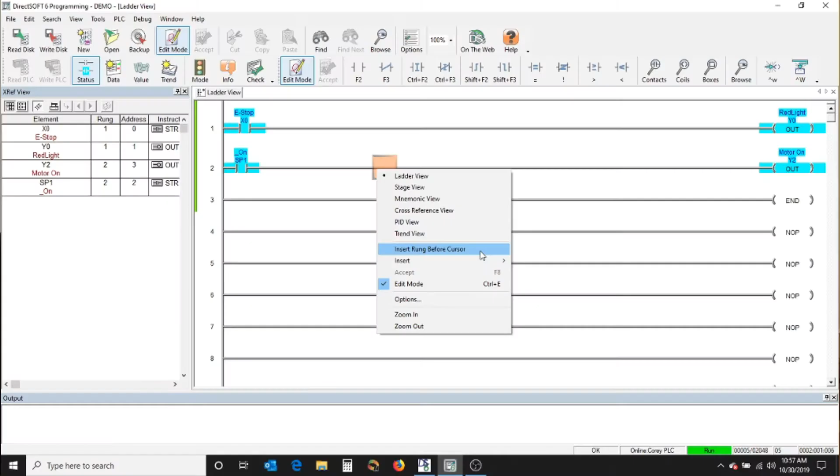So here we're going to activate our green light here by using latching relay logic. Okay, so we want to have our X7 button start the motor, and we have to have our E-stop on. So X7 and X0, we want both of those to be on.

And here in our coils, we're actually going to pick a set coil. Alright, and we're going to make that C1. And then our motor will latch on at C1. So that's the latching or setting of the controller.

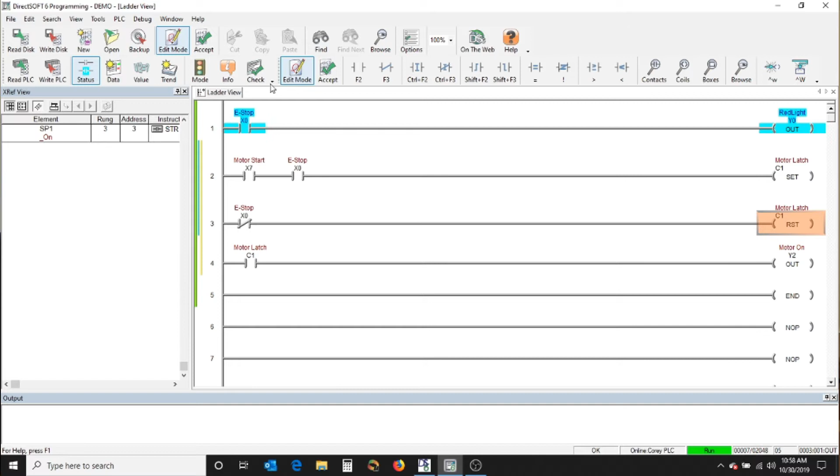And then we're going to add another one where we're going to say not the E-stop, and that will actually activate the coil, RST or reset. And make sure to type in C1 there so it actually works. Alright, we're going to go ahead and write this. So our E-stop is on, so we have a green light. Alright, turn that off. Doesn't do anything.

Alright, so here if I press this, you can see it go ahead and set our motor latch to on, and therefore our motor would be on, which is Y2. Alright, if I press the E-stop, it resets it.

Alright, now let's just make sure that from before that when the E-stop is pressed that we can't go back and start the motor, which we can't because our E-stop is not on. When we release that, go ahead and put it right back on. Alright, so that's the second way to do latching and resetting.

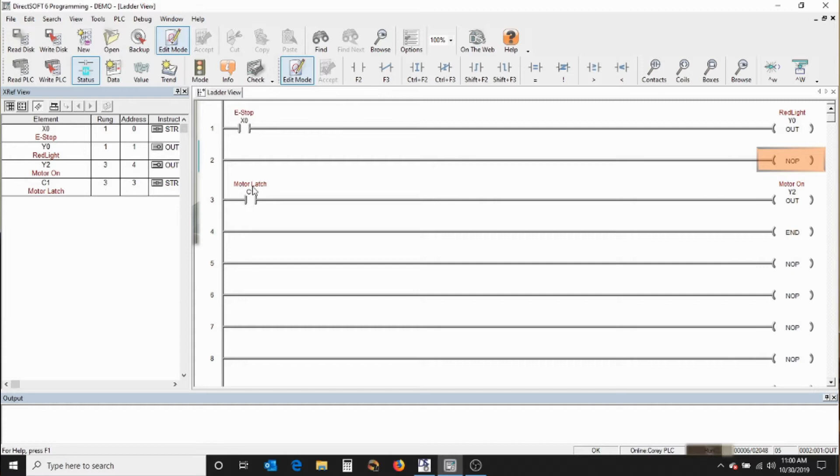Alright, now let's look at timers. So in a PLC, doing a timer is very easy. Back before that, you'd have to buy timing relays, which are not cheap. So in our logic, we have contacts, which are the lines or the lines with the cross through them, and then we have coils, which are the things that will go on the right.

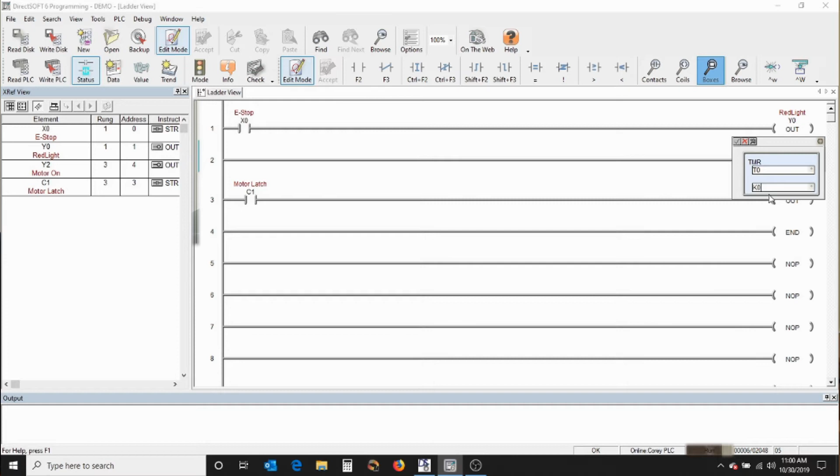We also have boxes. All right, so one of the cool boxes here is timers. And I'm going to use the timer box, and this timer box operates in tenths of a second. So every count here is 1/10 of a second. So I'm going to say that I want to count to 25. So that's 2.5 seconds.

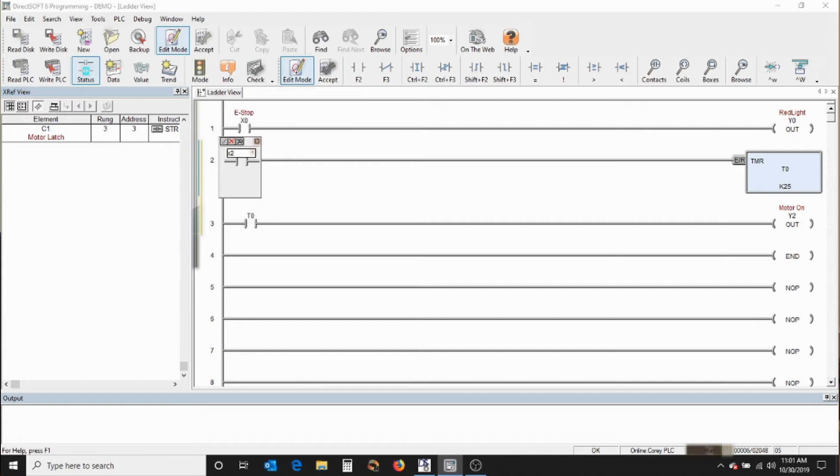And instead of using C1 to turn my motor on, I'm going to use T0 for timer 0. And I'm going to use button 2 to start my timer. Alright, so let's go ahead and write that.

So I'm going to say, theoretically, if I hold my clutch in for 2.5 seconds, it's going to start my motor. Alright, 1, 2, go. Alright, so there it is. And I got to hold another 2.5 seconds to make it go on. And I don't have any latching functions here.

Alright, so let's say I had a diesel motor and I was going to turn the key, and the key was going to first heat up the coil so that the fuel about to be combusted is warm enough to do it, and they've got a little heater there, and you hold the key in a certain position and then you can go ahead and start it.

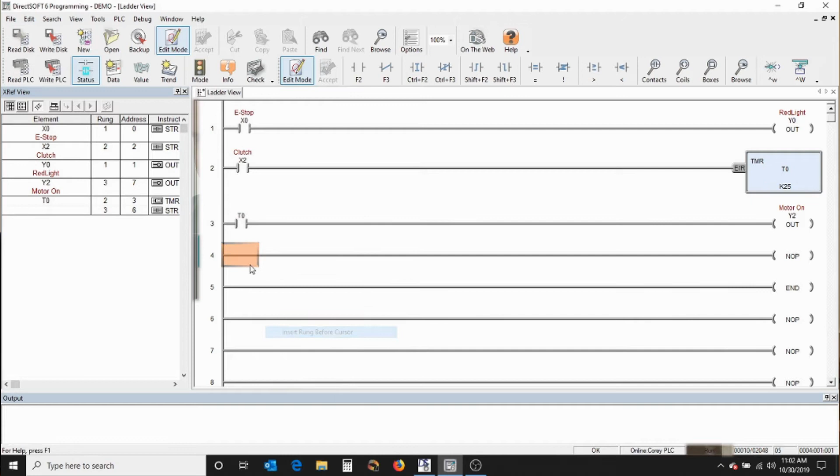Alright, so let's say that I'm doing that, and I want to indicate to the operator that I'm doing it. Generally not a light, it's probably a buzzer, and sometimes it's probably both. Alright, so what I want to say here is we're going to insert another line, and we're going to say if it's not T0.

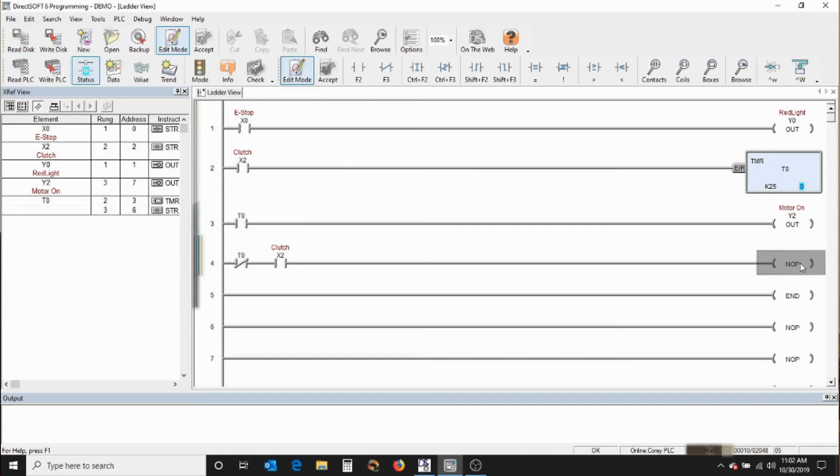Alright, so if it's not quite gotten to the timer count, what happens is that's going to be on all the time that we're not pushing X2. So we actually want to have the button X2 plus the timer. Alright, so we're going to have both of those, and then we're going to say we want Y1 to be on. Alright, go ahead and write that.

Okay, since I'm not pushing the clutch button, that isn't on. But as soon as I do it, the yellow light comes on, and then the green light will come on. The yellow light will go off. All right, if we do it again. All right, so that is a basic way of how to use a timer, and there's different variations. You can go in and look and see what all the different timers do.

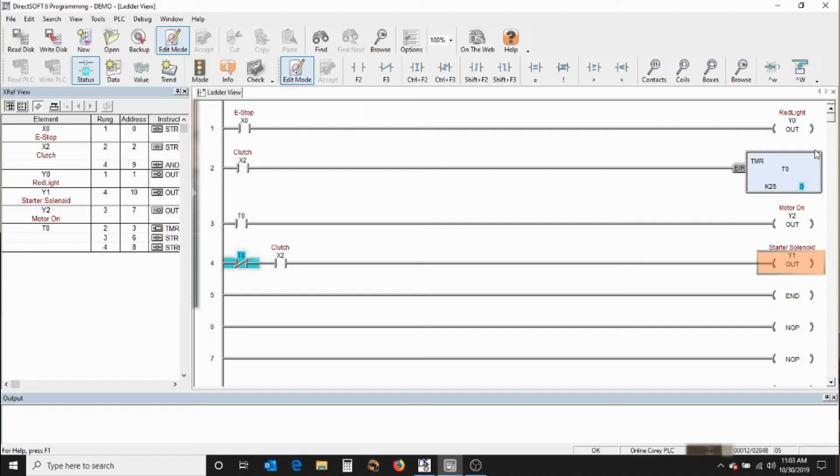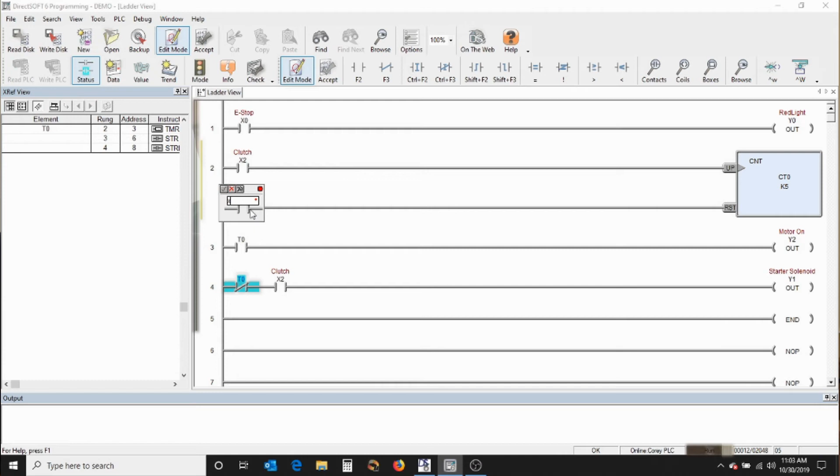So the next thing I want to show you is a counter. Counters are cool because you can do things that you really can't do with ladder logic. So we're going to replace this box here with a count, in this case CNT, and it just records how many times you've done something. So I'm going to count 5, and I'm going to use the clutch still. If I press the clutch 5 times, it's going to turn the green light on.

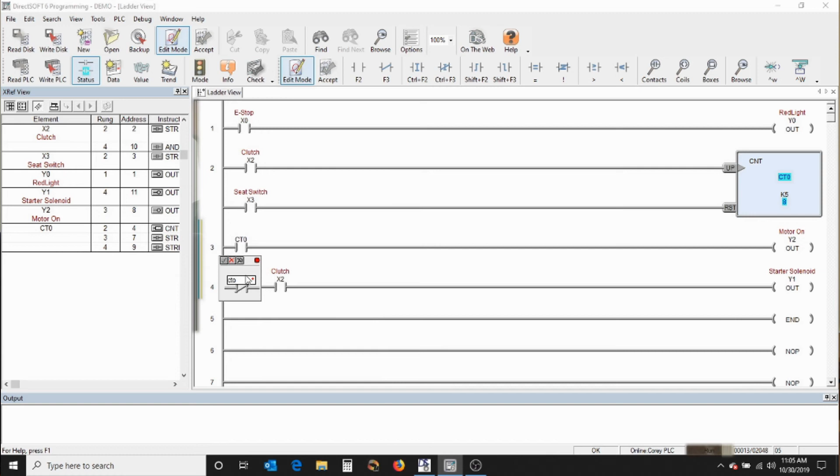Before we write the program, we also need to recognize that we switched from a timer to a counter, so it's a different label. All right, so here now it's CT0 instead of T0. All right, so I gotta change that to CT0. Oops, not CTO, CT0. And we'll go ahead and write that to the PLC.

All right, so we have our green light on. So I'm going to go ahead and restart that. And 1, 2, 3, 4, here it is, woohoo, 5, green light. All right, so that's what happens, and then I can reset it there. So counters are really not very difficult at all.

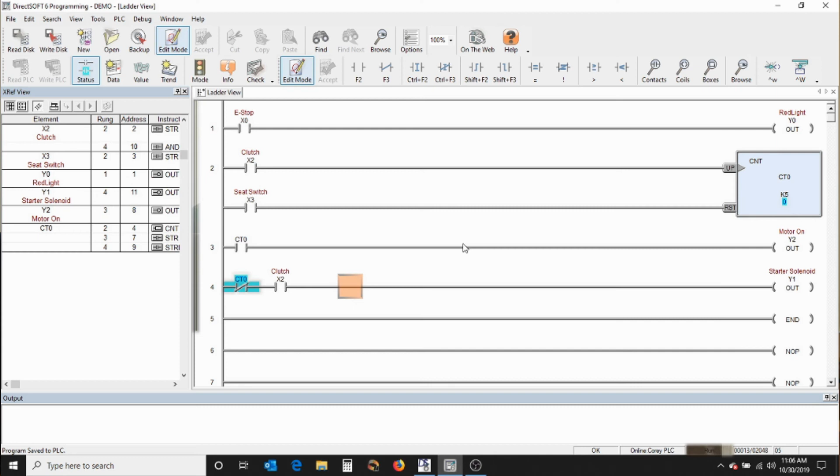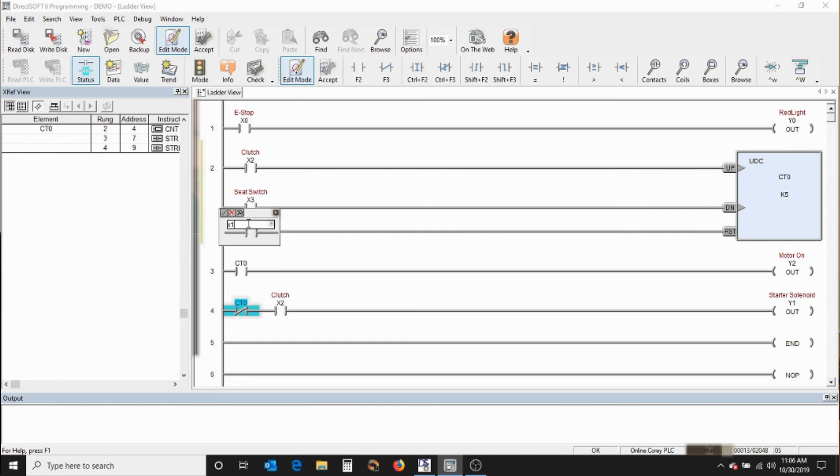One thing I want to show you now is an up and down counter. So we can use one thing to count up, another thing to count down. All right, so we're going to go ahead and replace our box here with the UDC, up-down counter. And same thing here, we can specify our variable, and we can count up, we can count down, and we can also reset. So I'm going to add in X1 will be my reset, and it's still CT0, so we haven't changed that, so we can keep using that. So let's go ahead and write our program.

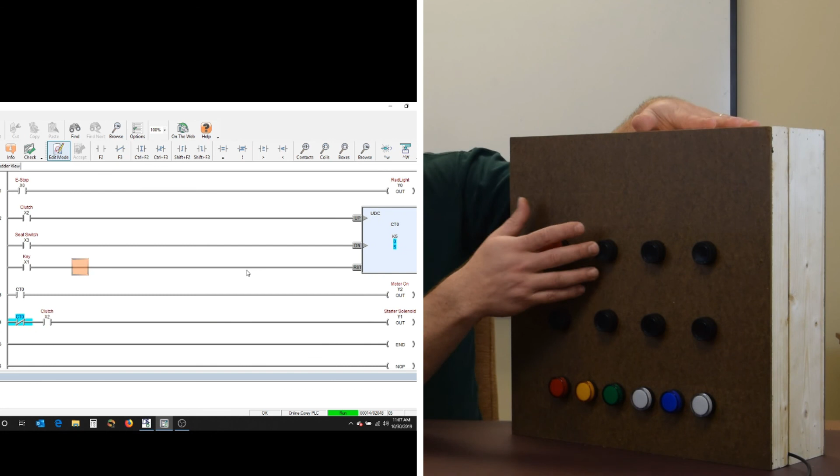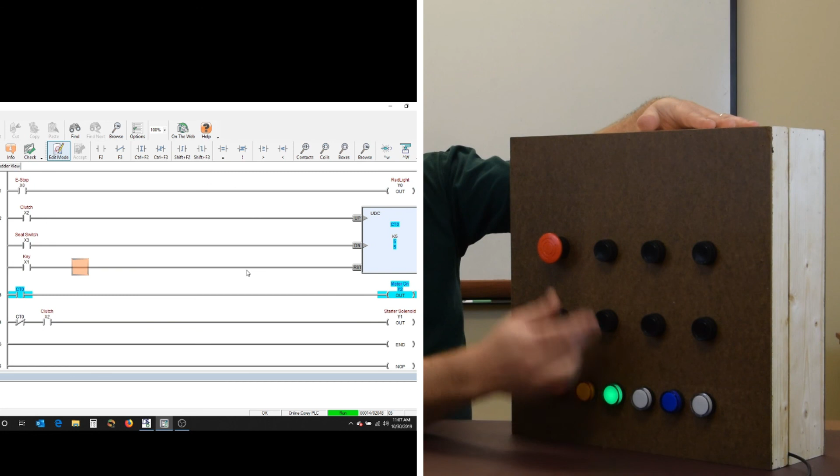And we're going to count up. I can count up 1, so I have a count of 1. I can count down, so I'm back to 0. And I'll just go up to 5. All right, if I go down 1, I'm back to 4. So it's off. Go up to 5, back on. 6, 7, 8. All right, it's still going to be on.

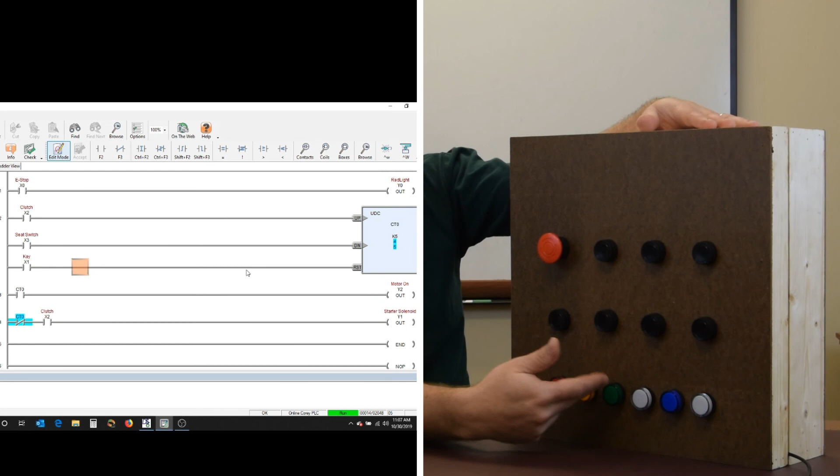I'm going to go down now. 1, 2, 3, and 4 will get us back to a count of 4, which will turn it off. All right, so that's pretty much it. Up-down counters are great. With counters, I don't really know how we would do that in straight up relay logic, but here it's super simple.